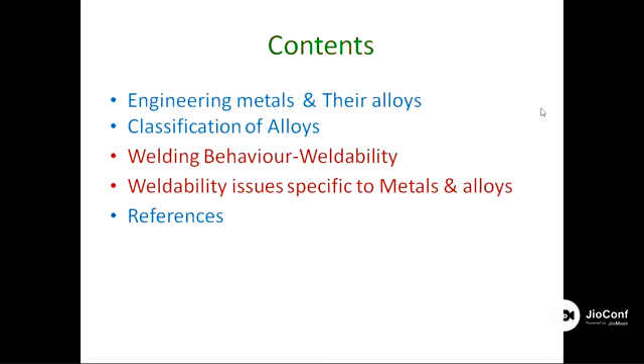Fine, so I'm now going with my slideshow. These are the contents I'll go through. I will start with engineering metals and their alloys introduction, then some classification of alloys at a glance, then welding behavior known as weldability, which is an issue specific to metals and alloys, and we'll end with references. I believe at the end of this presentation, you students will develop some interest in weldability, the welding behavior. You'll get to know about the behavior of different metals and alloys towards welding processes, and come to know about some specific issues and their troubleshooting approaches. So with this, I'm going to start.

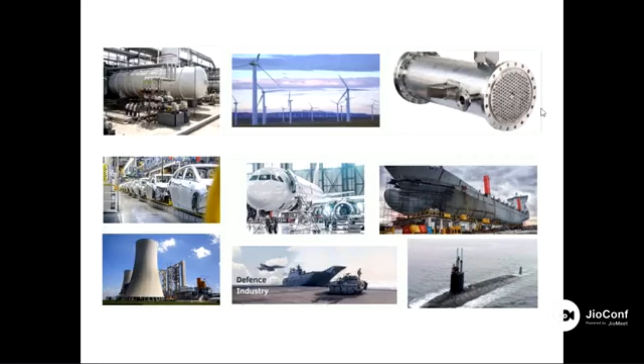In these pictures you are seeing many constructions belonging to power industries like boilers, pressure vessels, heat exchangers, wind energy, and also automobile, aircraft, and shipbuilding. So metals are used everywhere. Metals and their manufacturing processes, welding is used everywhere in all sectors. That is why it is very important to know about the various types of metals meeting these requirements, and the welding behavior of metals useful for construction of designs in various sectors.

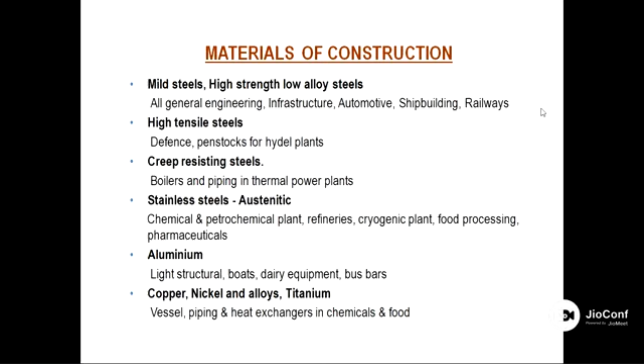Materials of construction are generally mild steel or high strength low alloy steels in sectors like infrastructure, automobile, shipbuilding, and high tensile steels in defense and hydel plants, and creep resisting steels, which are in demand for manufacturing boilers and piping in power plants. Stainless steels are used in chemical and petrochemical plants, refineries, cryogenic, food processing, and pharmaceutical industries. Aluminum, because of its lightweight, benefits light structural construction works, dairy equipment, and bus bar electrical applications. Then we have non-ferrous metals like copper, nickel and alloys, and titanium, which find application in the food industry, chemical industry, and power generating equipment. So there are various materials of construction used abundantly.

Now regarding the classification of ferrous alloys, there is a partition between cast iron and steel, because cast iron can only be cast, right? They cannot be given a shape because of their poor ductility. This is decided by the percentage of carbon present in the composition. High carbon alloys with carbon percentage more than 2% are cast iron.

There are a variety of cast irons like gray cast iron, white cast iron, malleable cast iron, ductile iron, high silicon cast iron, and whatnot. And steels have carbon percentage less than 2, practically 1.6, ranging from 0.03 to 1.6. The steels are again categorized or subclassified into plain carbon steel, low alloy steel, and high alloy steels.

I hope you students of automobile engineering are studying this because you have to deal with engine components. There are various parts like cylinder liners and cylinder heads, made of cast irons. And steels - the alloy steels are used for shafts, connecting rods, crankshafts, bushes, engine valves, and many more applications. Some of these materials you are also studying as part of your curriculum.

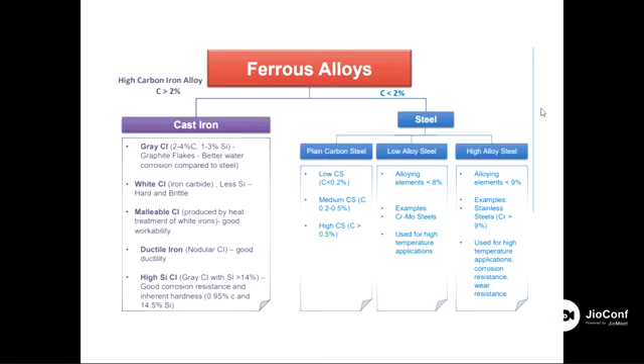So these are the classification of ferrous alloys. The classification could also be based on various aspects, like based on composition, based on manufacturing methods - how the steel is being manufactured, in the steel making route. Then there are finishing methods, deoxidation practices in steel making, refining methods, microstructures obtained, required strength, and heat treatment undergone. So classification is also based on the different aspects given in this table.

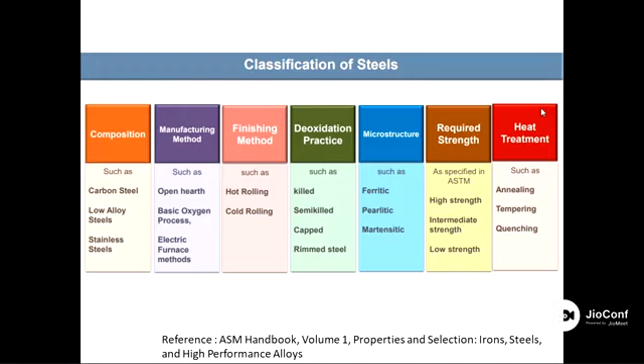Now talking about the plain carbon steel. Please see where my cursor is hovering - the plain carbon steel, when subsequently alloyed with chromium, molybdenum, niobium, vanadium, and nitrogen, their properties are improved - properties like high temperature strength, pitting corrosion resistance, creep corrosion resistance. So they have also been microalloyed with some alloying elements like vanadium, tungsten, boron, and titanium.

On the top left, you would see a picture of a steam pipe, which could be used at 600 degrees Celsius and pressure around 30 megapascal. What is the idea of showing this picture? Because with the use of various grades, if you manufacture this pipe for this application with P22 material, the thickness is going to be around 150 millimeters. But for the same parameters, if the pipe is designed with X20 materials, the thickness could be around 77 millimeters - some reduction in thickness.

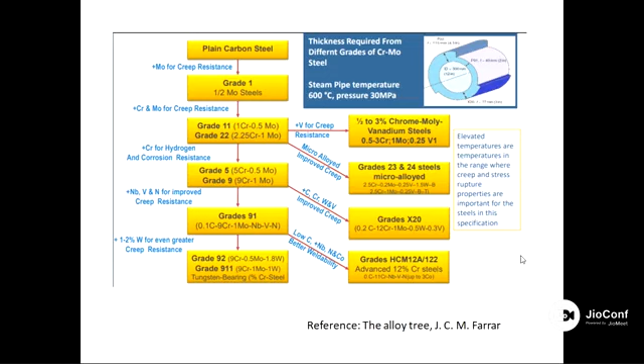Now talking about the stainless steel families - they have 5 members. Austenitic stainless steels - the popular grade is 18-8, grade 304, with 16% chromium and 6% nickel. Ferritic stainless steel has 10.5 to 18 percentage of chromium, and the commercial grades are 430 and 409. Duplex stainless steel has a mixture of ferrite and austenite - a two-phase steel, and the popular commercial grades are 2205 and 2304.

Martensitic stainless steel has a lower percentage of chromium, about 12%, and commercial grades are 410 and 416. They are of ferritic type because chromium is a ferrite stabilizer.

The last category is PH steel, which is precipitation hardenable steel. They contain chromium and nickel and have very good tensile strength. A popular grade is 17-4 PH, where 17 stands for chromium percentage and 4 for nickel percentage. The strength is obtained through precipitation hardening treatment. But austenitic stainless steels are not hardenable; they can only be annealed.

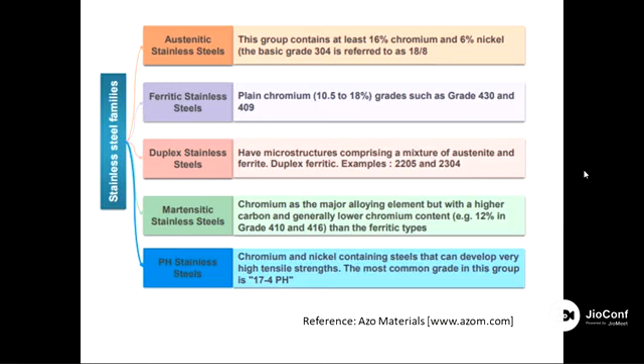Ferritic stainless steels cannot be hardened at room temperature; the structure is ferritic. Duplex stainless steels are also not hardenable. Only martensitic stainless steels can be hardened, and the precipitation stainless steel hardening mechanism is different - it undergoes a solution and aging treatment rather than conventional hardening. So these are the family of stainless steels, used for different applications.

Now moving forward to the austenitic stainless steel family. Their popular grades are 304, 316, 316L, 316N. We need to understand the role of alloying elements like chromium, nitrogen, or niobium. There are also grades like 321 where titanium is added, and 347 where niobium is added, just to meet specific requirements.

Because when these steels are put into environments where there are chromium carbide or sensitization issues, we use 321 grade or 347 grade. So there are very specific applications for this stainless steel family.

Overall, austenitic stainless steels have good corrosion resistance and are suitable for high temperature. But the drawback is they are susceptible to chloride stress corrosion cracking. In chloride or saline environments, they suffer from stress corrosion cracking and pitting corrosion issues, and they are not good for high temperature applications above 350 degrees Celsius because they are prone to oxide scaling.

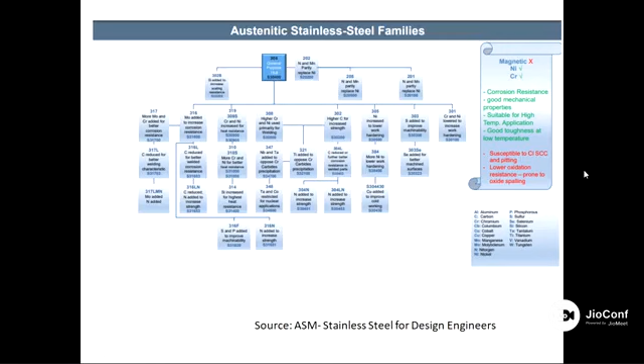Next is ferritic stainless steel. Ferritic stainless steels have very good corrosion resistance. Popular grades are 409 and 430. Again, they are not suitable for high temperature - they are subjected to 475 embrittlement, which European countries call 885 degree Fahrenheit embrittlement.

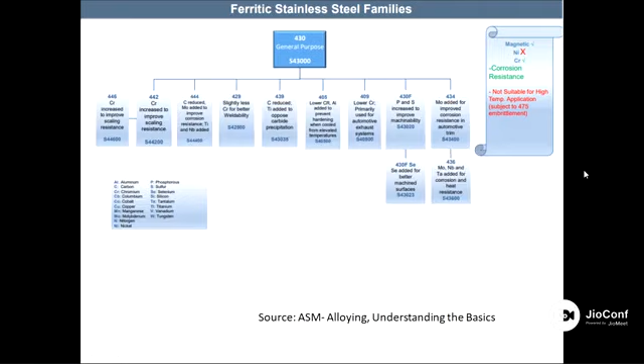What is 475 embrittlement? When these ferritic steels are exposed to 475 degrees Celsius during service for a longer period of time, the ferrite decomposes into brittle phases like sigma and chi phases. The structure becomes brittle and is no longer able to take the stresses, leading to structural failure. So they are not suitable above 475 degrees Celsius.

Martensitic stainless steels are magnetic in nature, but nickel is not present - chromium is the main alloying element. This steel is hard to weld but is used for corrosion resistance applications, and it has very good hardenability - it's hardenable by heat treatment but not easy to weld. Hardenability and weldability are opposite to each other: higher the hardenability, poorer the weldability, and vice versa.

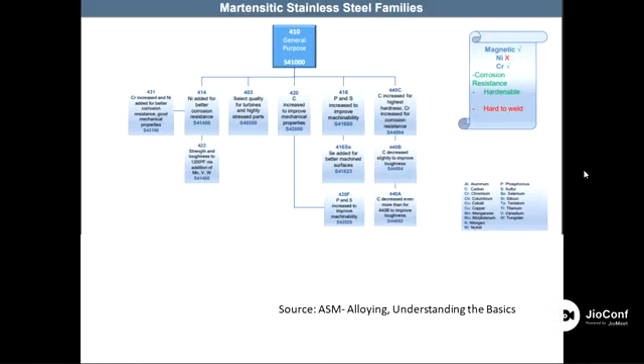Now next is the duplex stainless steel family. It is a two-phase stainless steel with ferrite and austenite present. Duplex stainless steels are used for applications demanding sour service, such as digesters and paper industries, and many applications where corrosion resistance and high pitting resistance in chlorine environments are required. But they are again not suitable for high temperature applications because they are subjected to 475 embrittlement like ferritic stainless steel, since ferrite is also present. The duplex stainless steel structure contains approximately 50-55% ferrite and 45-55% austenite - a two-phase structure - and the main alloying elements are chromium, nickel, and molybdenum.

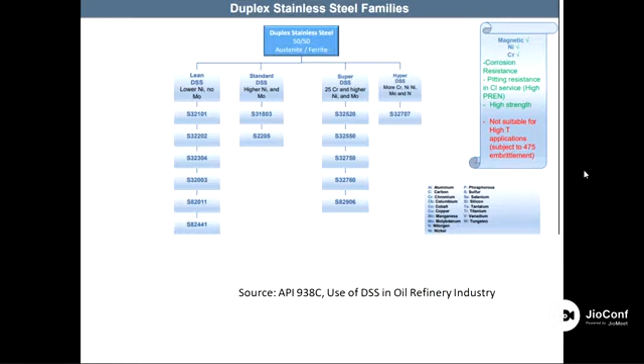They are being used for many applications demanding high temperature. The noteworthy point with the nickel-based alloys is that they can be used for high temperature or for low temperature and cryogenic applications. Again, the role of alloying elements is there - the addition of chromium, molybdenum, and copper, and some micro alloying elements in alloys like X750, give birth to super alloys. The super alloys are extensively used for gas turbine requirements. So there is a role of alloying elements in a certain quantity, and the base metal, when alloyed with various kinds of alloying elements, becomes superior in strength, mechanical strength, and corrosion resistance, so they can meet the demand, they can meet the applications required, right?

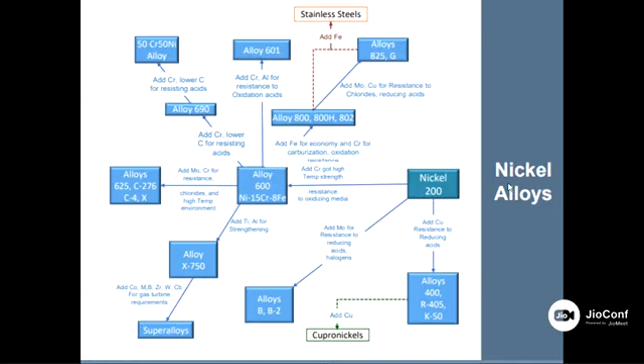Okay, anyway, I think we can have a good introduction after this webinar is over. But in a nutshell, I wanted to say that the composition of stainless steel and nickel alloys are overlapping, in terms of nickel and chromium. But in a nickel-based alloy, the majority of nickel is there. In stainless steel, there is added Fe, meaning more iron content. So both stainless steel and nickel-based alloys are used for common applications, but when the application demands high temperature strength or cryogenic strength, or strength maintained at cryogenic temperature, nickel-based alloys are most selected.

So moving to the next slide. Now, before I start with the welding behavior, I think it's good to give you a background of the relationship between composition, microstructure, and mechanical properties.

This presentation is in context with the weldability of metals and alloys and their welding behavior, because for your automobile applications, most of the time you go for spot welding, you use GMAW welding. There are many thousands of spot weldings, and many gas metal arc welding processes used.

Whenever the metals or any engineering material is described, particularly low alloy steel and stainless steel, their chemical composition and thermal cycle matter. Thermal cycle means during welding, heat is given to the material for obtaining proper fusion. That fusion can be achieved with filler metal or without filler metal, but this heating and cooling cycle is known as the thermal cycle, because when heat is applied through the arc, the temperature rises. At the same time, when the weld joint is completed, the weld cools, so temperature drops.

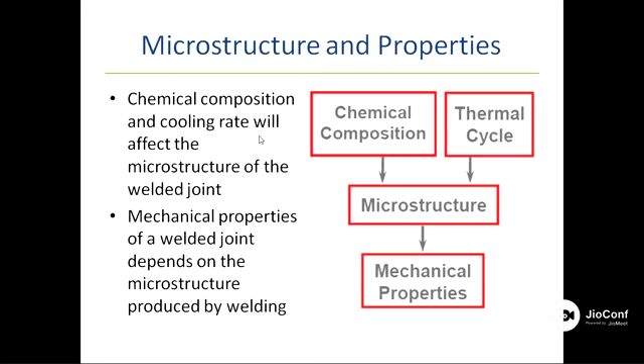In a matter of few seconds, the microstructure is decided, and there are various metallurgical phenomena involved, like melting and solidification. Because here the base metal is partially melted, and you are adding a filler metal, there will be melting phenomena, solidification phenomena, and nucleation and growth, because the moment the metal cools, nucleation will start, and the growth of the grain starts.

Then there will be phase transformation. It means initially the structures, when heated, all structures convert to austenite phase. Then from the austenite phase, talking about various carbon steel, low alloy steel, they are transferred back to ferrite, pearlite, and some cementite, and probably bainite. So the nucleation growth, there are many such things taking place.

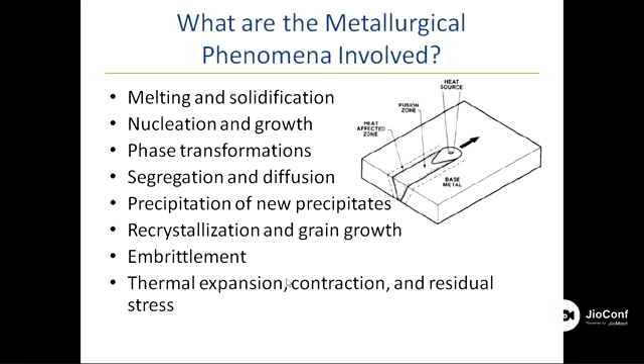So this kind of structure, if it is not post weld heat treated - in automobile structures, like dual phase steel, or high strength low alloy steel (HSLA steel), if they are not given proper treatment, they may be subjected to embrittlement, because many hard phases are present, like martensite, like bainite. The martensite has to be tempered by means of post-weld treatment.

Because I had told you that whenever it is heated above the welding temperature, the fusion temperature, the phase developed is austenite, single phase, in carbon steel or low alloy steel. And whenever it cools by different cooling ways, depending on how the cooling is achieved, it forms either coarse pearlite, fine pearlite, bainite, or if it cools quickly, it forms martensite. So it's a matter of few seconds available, and the microstructure is decided. So you can understand that in welding processes, the welder has very little control over the development of microstructure.

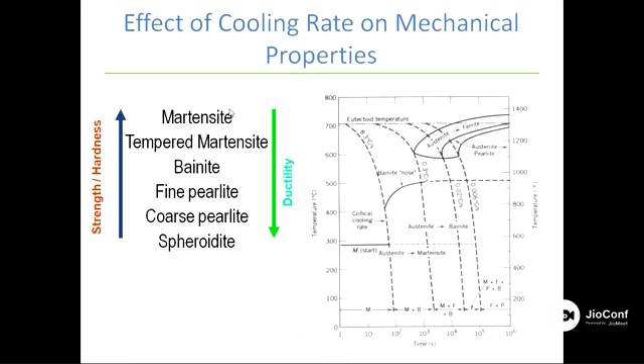So the welding procedures have to be decided and checked for producing production welds. Procedures mean what kind of consumables will be used, what parameters can be used, like heat input, interpass temperature, what kind of pre and post weld heat treatment, what kind of shielding or flux will be provided, or flux coating, or processes will be used depending on the process. So there are various procedure qualification tests.

Now we are coming back to our main topic. I hope by this time you know that weldability is all about the behavior of metals under welded condition and during service conditions. Because under welded condition is different - some defects like hot cracking can immediately crack after welding. But during service condition, like delayed cracking, like hydrogen embrittlement, that can happen during service.

It means once you have produced a part, a welded component or welded assembly, when it is put into service, and if it is subjected to temperature for prolonged exposure, say some elevated temperature range like 400, 500 degrees and so on, it may be subjected to creep.

So during service, parts can also fail. Weldability is all about the behavior of metals. In other terms, it can be defined as the ease with which a metal can be welded to give the required service, because metals are selected based on their strength, corrosion resistance, and resistance to various environmental factors. So it is the amount and nature of the problem you face to weld a material.

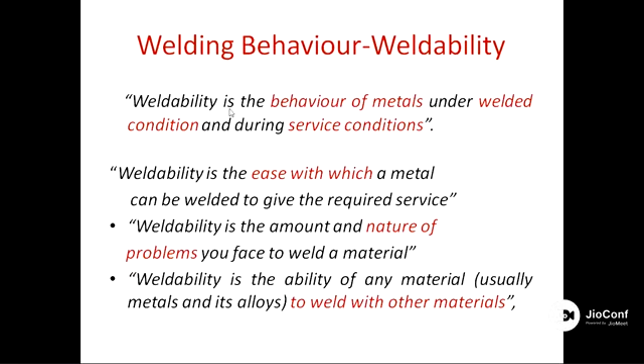Weldability, in other terms, can also be known as the amount and nature of the problems, because when we are joining materials by the process of welding, we come to know about the issues. That study is also known as weldability, and in simple terms is the ability of any material to weld with other metals. But these are various definitions about welding behavior, or weldability.

There is a standard definition given by the American Welding Society: weldability is most often used to define a material's resistance to cracking during fabrication. In other words, good weldability is resistance to various forms of cracking during welding, requiring essentially no rework or repair.

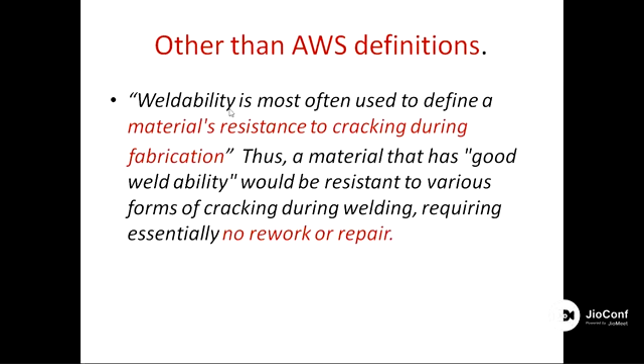Because during the process of welding, if your part is cracked, then you have to rework or repair it. Now, issues with weldability - like in your automobile, when austenitic stainless steels are used, particularly in a muffler or silencer. Most of the time it's a low carbon steel coated with nichrome plating, but in some grades of automobiles where austenitic stainless steel is used, there is a problem in the weld zone.

This is solidification cracking and micro fissuring - these are known as micro cracks, occurring in the weld. I hope now you understand the heat affected zone - it is the area adjacent to the weld line, the area which has been subjected to and affected by the process of heating and cooling, or the thermal cycle.

So if the weld pool is not protected from the atmosphere, and hydrogen gets diffused into the structure in the heat affected zone, then hydrogen induced cracking, or cold cracking, can take place. Liquation cracking is another phenomenon - it happens because of the presence of low melting point metals. And reheat cracks particularly take place with chrome moly steels and creep resisting steels.

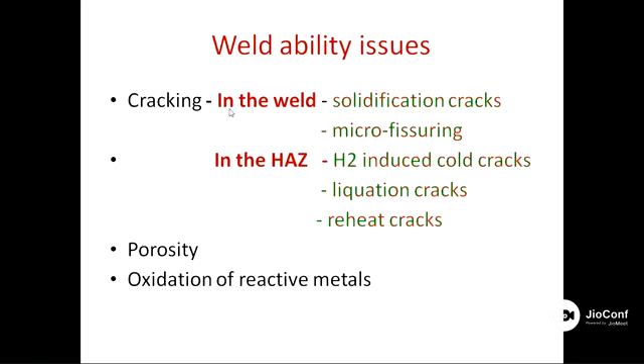Other issues include porosity - welding of aluminum will end up with a porosity problem - and oxidation of reactive metals like aluminum, magnesium, titanium. They are very reactive to oxidation.

Reduced joint strength takes place particularly in the welding of aluminum, because the strength of aluminum drops due to the welding process, and the strength also drops in the heat affected zone. You know the logic, because you join materials for doing some structure, for making an assembly.

Why do you go for welding? You are connecting different members, and the load is transferred through the members. Being a mechanical or automobile engineer, when the load is transferred through the members, it is transferred across the welds. You put in different parts, but if these welds have poor strength compared to the base metal, then the whole stress is going to be concentrated on the weld metal or the heat affected zone.

So cracks will develop there. The weld metal and the heat affected zone, or the weld, should have a matching strength with the base metal - then only it can be used satisfactorily for the application.

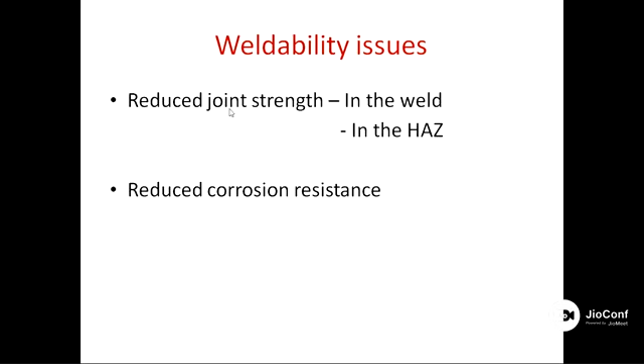Let us first understand the oxidation of reactive metals. If you weld non-ferrous metals like aluminum, magnesium, titanium and their alloys - in automobile industries from road transport to aerospace applications, light metal alloys like aluminum, magnesium, and titanium are used - but their welding is very challenging because aluminum can quickly form Al2O3, aluminum oxide.

Magnesium has high reactive oxygen, magnesium oxide, titanium dioxide. So during welding, there has to be proper shielding. In welding of titanium, proper shielding is to be given, such as back purging or other shielding methods, as there are many ways in which the molten weld pool of these materials have to be protected.

Gas metal reactions will also take place because of poor shielding or poor welding positions, where nitrogen, oxygen, or hydrogen gases from the atmosphere quickly react with the molten metal. This gives defects like porosity in steel, oxide porosity in copper and nickel, and hydrogen porosity in aluminum and titanium. So the filler metal or welding consumables make use of deoxidizers.

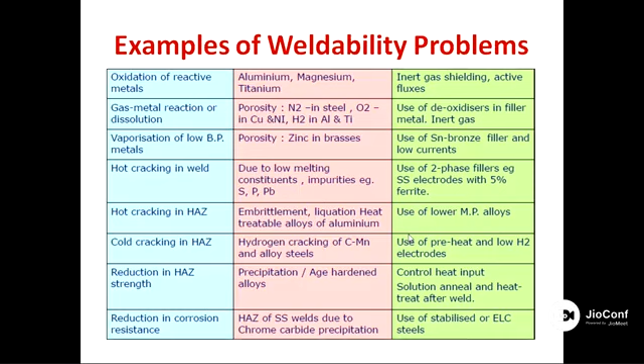Because of this welding behavior, as I mentioned in the previous slide, I tried to explain the welding behavior of various ferrous and non-ferrous alloys like carbon steel, carbon manganese or low alloy steel, stainless steels, and from the non-ferrous side, aluminum, magnesium, titanium. These alloying elements are grouped depending on their weldability, properties, and mechanical properties. This has been taken care of in ASME, American Society of Mechanical Engineers, Section 9.

So in the field, when you use welding for automobile applications, you'll be using ASME Section 9, the construction code. There's a separate construction code for pipelines, the API, American Petroleum Institute. There are many different codes, ISO codes like ISO 15608. These codes have grouped various materials according to their welding behavior.

What is the logic behind this? The logic is, as I mentioned, welding behavior is different for different materials. So to qualify any procedure, we can reduce the number of procedure qualification tests, because if you want to weld two metals X and Y, and the same kind of X and Y metals are grouped together, you find it easy.

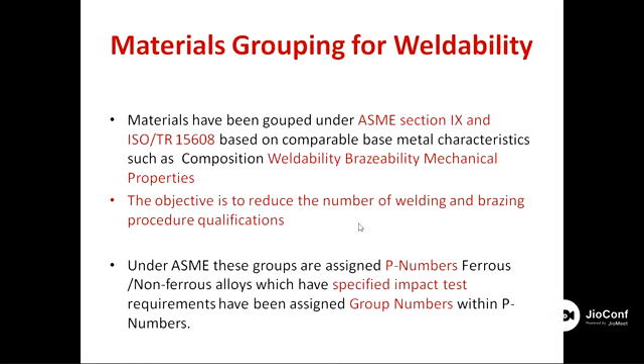These are very important. For your reference, I have tabulated the various P numbers, not G numbers - the G numbers are generally 1 and 2, depending on impact strength. The steels are covered under ASME Section 9 code, and there's an International Standard Organization code, ISO 15608. These are the groups in which steel is there, aluminum as well.

If you want to find out the purpose of this: all aluminum and aluminum alloys from P number 21 to 25 have the same welding behavior - that is the interpretation of this table. So you find out which aluminum alloys range from 21 to 25 P number; they have the same welding behavior. It means it's easy - if you use a procedure for 22, the same procedure works for 24, and the same for 25, but not for 26 or something.

But with ISO, it is 21 to 26. If you use say 28 for example, aluminum alloys, their welding behavior will be altogether different - this cannot be used the same way. Copper and copper alloys are likewise 31 to 35. Nickel and nickel alloys are 41 to 47 under P number. Titanium and titanium alloys are 51 to 53. Zirconium and zirconium alloys are 61 and 62. Cast iron is not covered in ASME Section 9, but with ISO it is covered as 71 to 76 as a P number.

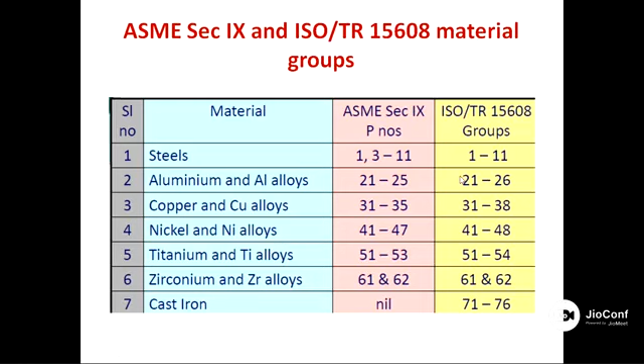Moving next, there are some pictures of the weldability issues I mentioned. You could clearly see a crack here. Excuse me, please give me 1 minute so I can sip some water.

In a heat affected zone, you could literally see this dark region, which is the heat affected zone. These two metals are joined, and you can see this heat affected zone with a clear crack - this is hydrogen cracking. You would see a center line cracking here; there are two plates joined together, and you will see center line cracking.

Then there's lamellar tearing - a new term for you. Lamellar tearing is caused by the presence of non-metallic inclusions. During the steel making practice, some inclusions are developed - oxide inclusions, nitride inclusions, sulfide inclusions. Whenever these inclusions are present in a rolled steel structure, a hot rolled structure, and when you perform welding, you will end up with cracking, resulting in lamellar tearing.

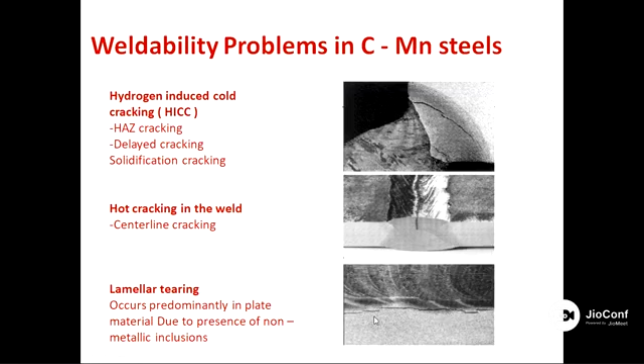Now, for carbon steel and low alloy steel, the most important thing is carbon equivalent, CE. With this formula, if you put the value of your composition into this formula, you can find out what is the value of your CE, carbon equivalent.

If your carbon equivalent is ranging less than 0.35, you need not go for preheat or post-weld treatment. It means there is no danger of hydrogen embrittlement or delayed cracking, or any issues related to cold cracking. But if your carbon equivalent percentage ranges from 0.35 to 0.55, you need to go for preheat. If it is more than 0.55, preheat and post-weld heat treatment both are mandatory.

And if the CE value is more than 0.5, this steel is more difficult to weld without cracking. So this is the idea about the carbon equivalent, and it gives the measure of the susceptibility to brittleness. So higher the CE, lower will be the weldability. That you can find out from these values of the table.

So what are the alloying elements that can be accounted for the carbon equivalent calculation? It is carbon first, then manganese, chrome, moly, and vanadium, then silicon, nickel, and copper. But they are in very least amount. The coefficients of chromium, molybdenum, and vanadium are high in percentage.

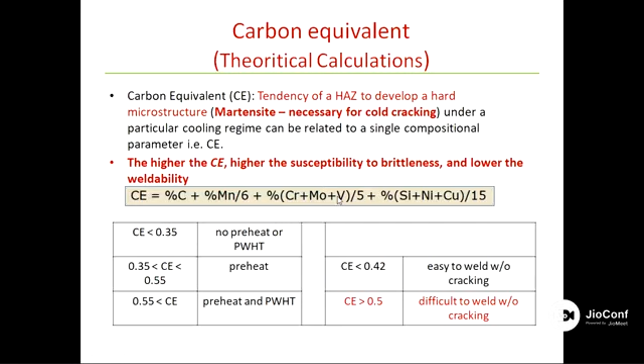Okay, now moving to the next slide. I will touch upon two categories of steel. One from the ferrous category, that is austenitic stainless steel, which is most used in automobile applications. Then next, low alloy steel and high strength low alloy steel are also used, but for their welding behavior, you have to go for preheat, post-weld heat treatment, and controlling the microstructure. This kind of practice is required.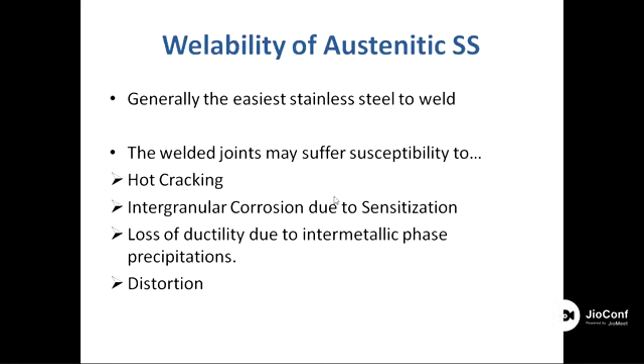Austenitic stainless steel is susceptible to hot cracking and IGC attack, intergranular corrosion attack, and loss of ductility due to intermetallic phase precipitation, and distortion. Distortion means after welding, the dimensions are changed, or the material bends or warps, and all dimensions are lost.

So to understand the weldability or welding methodology of stainless steel, it is with the help of a pseudo binary two-phase diagram of nickel and chromium. But just to give you an idea, it is the way in which the alloy is solidified. If it is solidified in the austenitic mode, austenitic-ferrite mode, primary ferrite and secondary austenite, or fully ferrite, then a different microstructure is developed.

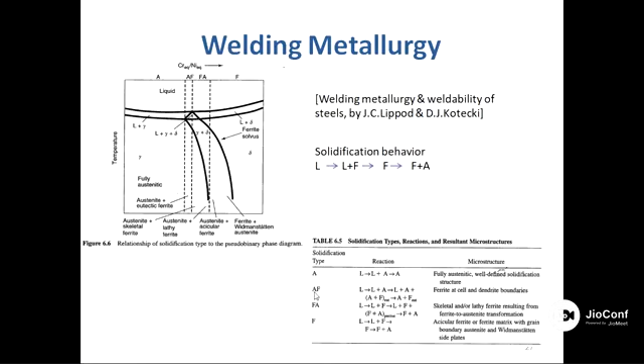So in a nutshell, what is important from the austenitic steel welding point of view is it should be solidified under FA mode, primary ferrite, secondary austenite. Then it is less susceptible to the hot cracking issue.

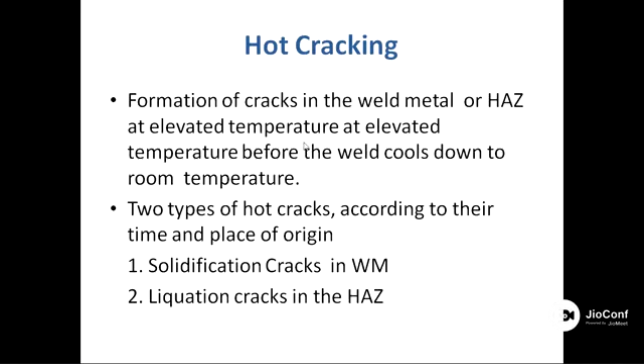This hot cracking, or solidification cracking, as I mentioned, takes place in the weld metal, and liquation cracking takes place in the heat affected zone. So to understand the solidification cracking issue, these low melting elements like sulfur, silicon, phosphorus tend to segregate at the grain boundary. During the process of cooling, when the weld cools, shrinkage takes place, and this shrinkage pulls apart these two grains from the grain boundary, and literally a crack is observed.

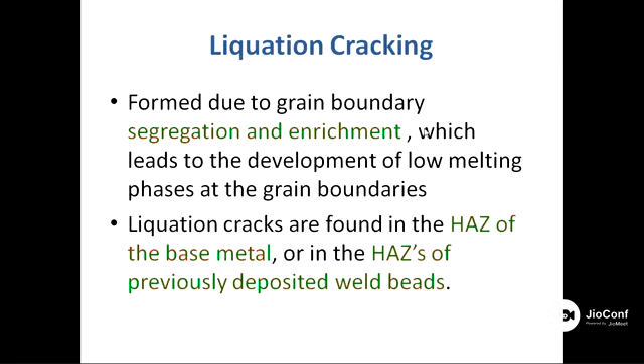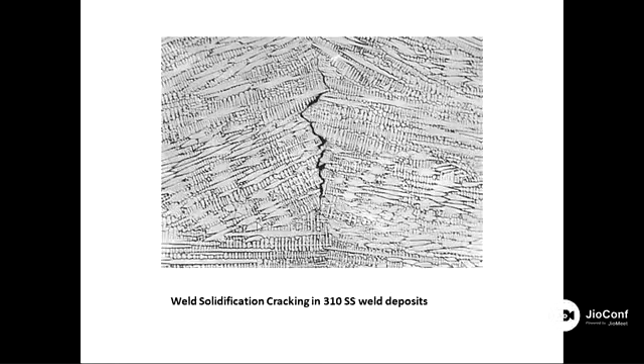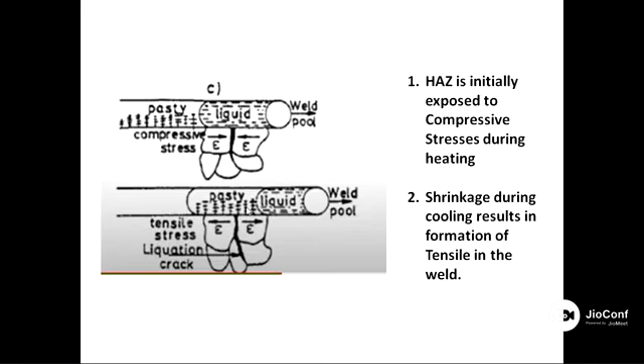Because of the tensile stresses shown in this figure, cracks are produced whenever there is a presence of low melting point eutectics in the grain boundary. These do not support the strength, but separate the grains from each other at the grain boundary interface, resulting in cracking.

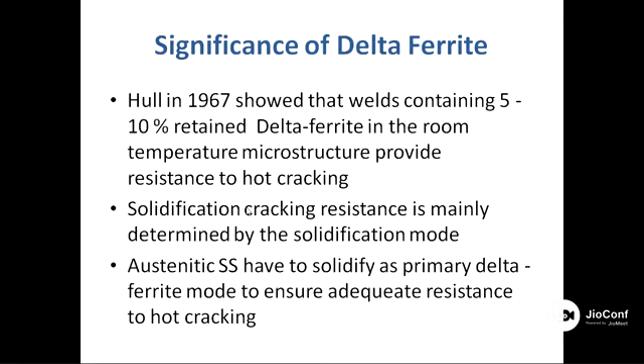It is important to mention the significance of delta ferrite, but to keep pace with time, I'll jump to the conclusion: when performing welding of austenitic stainless steel, you need to have 5 to 10% delta ferrite present in the structure. Then you can avoid weld solidification cracking issues.

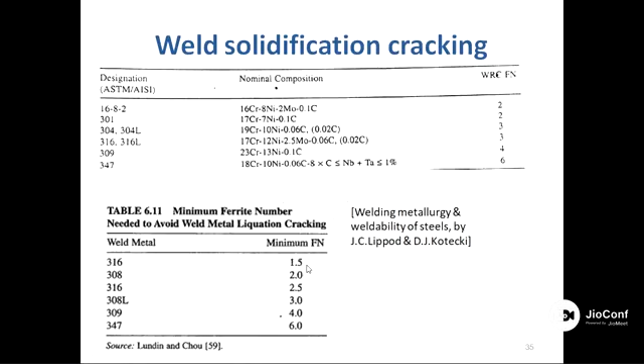So there is a minimum ferrite requirement for your weld metal of austenitic stainless steel depending on the grade. For a higher grade like 347, you require 6% minimum ferrite number. Otherwise for 316, 1.5, or practically 3, is more recommended.

Now, you have estimated your weldability using the carbon equivalent formula, right? I hope you remember it, the CE formula, which we saw in our previous slide. It is applicable only to carbon steel and low alloy steel.

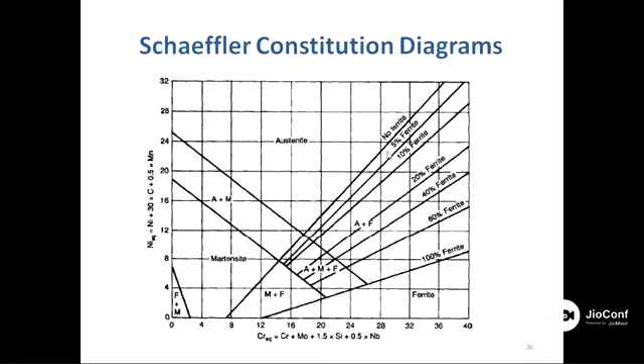Likewise, for stainless steels, there are various constitution diagrams like Schaeffler, DeLong, and the latest one, the WRC - Welding Research Council constitution diagram. The latest version is the 1992 diagram.

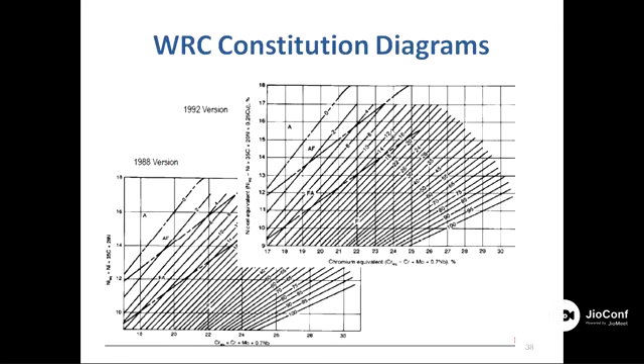What is the use of this diagram? You put the composition of your base metal, you put the composition of your filler metal, and you spot where you are. If your ferrite number is between 3 to 8, as I mentioned in the previous slide, then you are safe - your weld is not going to crack. This is the use of this constitution diagram.

The last topic is weldability of aluminum alloys. Welding of aluminum is most of the time done with gas shielding processes, because flux-based processes like SMAW electrodes are not successful - although fluoride flux is effective, it is highly corrosive. So it is not recommended, and most of the time GTAW and GMAW welding processes are used for aluminum weld structures in automobile engineering.

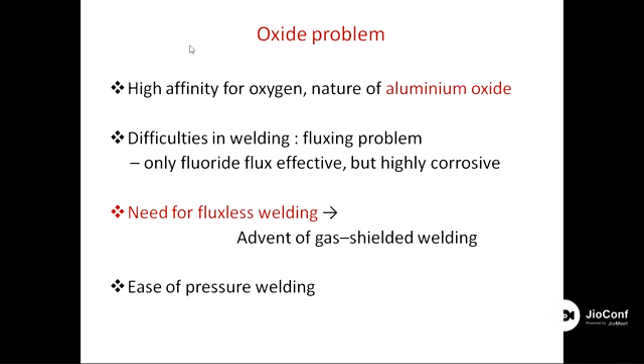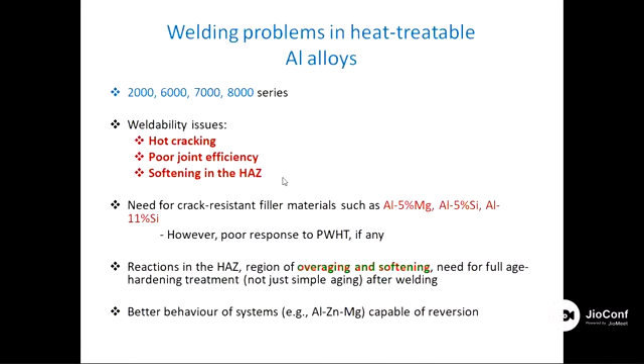Also some solid state or pressure welding processes are used, like friction welding, friction stir welding, and likewise. So I'm telling you about weldability issues in arc welding processes, particularly GTAW and GMAW. There are issues like hot cracking, poor joint efficiency, and softening in the heat affected zone, resulting in drop in mechanical strength and hot cracking issues.

So what is the remedy? The remedy to avoid solidification cracking is selecting the filler metal composition precisely, because when joining aluminum, you have to select a filler metal for GTAW and GMAW welding processes carefully. Secondly, your joint design is also important. Third is heat input control, and fourth is grain structure control.

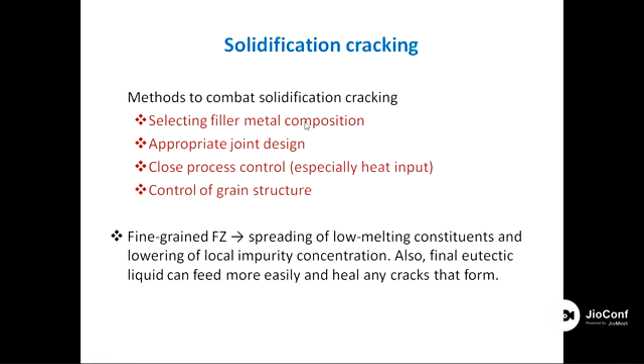In a nutshell, there are various diagrams giving an idea about cracking tendency versus various alloying elements: cracking versus percentage silicon, cracking versus percentage copper, cracking tendency as a function of percentage magnesium, and cracking tendency as a function of magnesium silicides.

You could see that if your consumable filler metal uses silicon at 4 percentage, the cracking tendency increases when less silicon is present, up to 2%. But when silicon is present more than 2%, the graph peak slopes back and becomes continuous, so you have less cracking susceptibility. So you should use a filler metal with more than 2 percentage, practically 4 percentage, silicon.

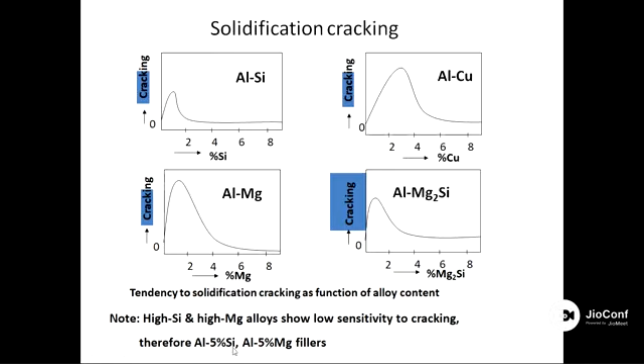Likewise, use magnesium with more than 6 percentage. So Al-Si and Al-Mg fillers are used; they can be used for welding of aluminum alloys.

I think I have maintained the time given to me.

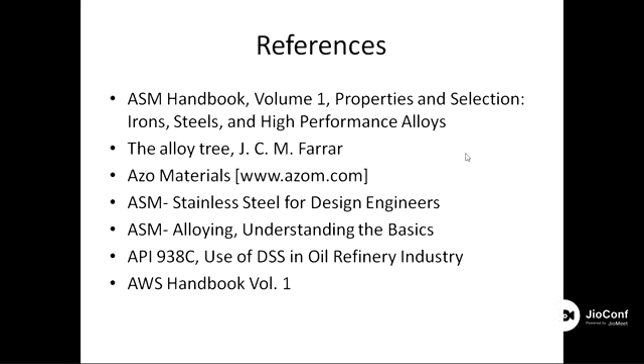So this presentation is prepared from the references and literature available with me, and I thank you all for your patient hearing.

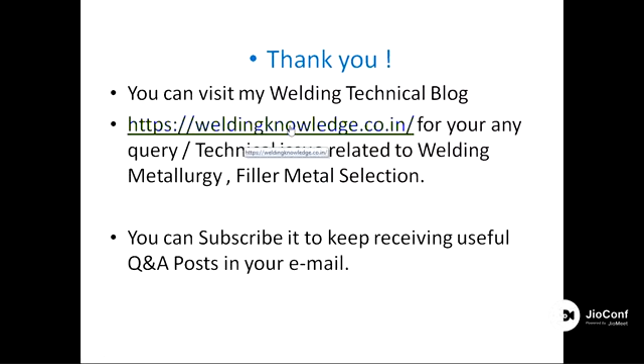So, any questions from you people? I'll be very happy to give answers to your questions.

Now I am going back to my original screen, and I am stopping the screen sharing of the presentation. I hope you found this talk interesting.